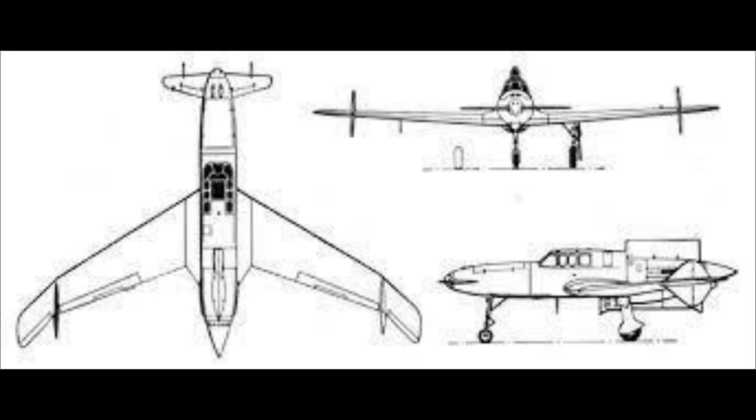Interestingly, it specifically allowed for out-of-the-box thinking, unconventional aircraft designs. Yes, children, you do not need to color inside of the lines. And with the XP-55, Curtiss-Wright definitely decided to color outside of the lines.

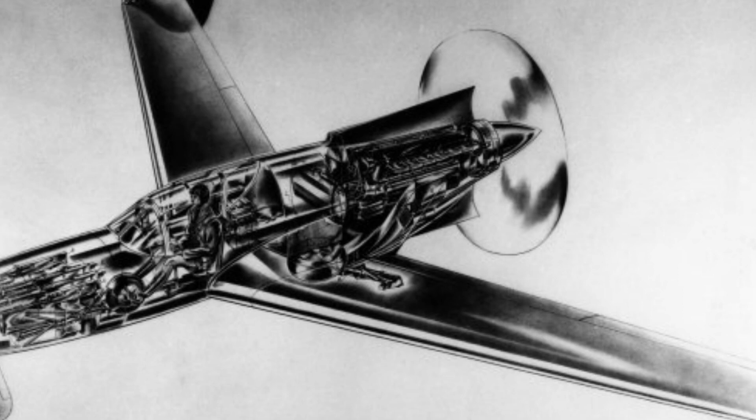Firstly, they decided to put the engine in the back, which is called a pusher configuration. Now, that is not inherently radical, as plenty of aircraft over the years, including the Wright Flyer, have been pushers. There are actually lots of advantages in having the engine in the back, especially when thinking of the requirements of the R40C proposal. The first is performance.

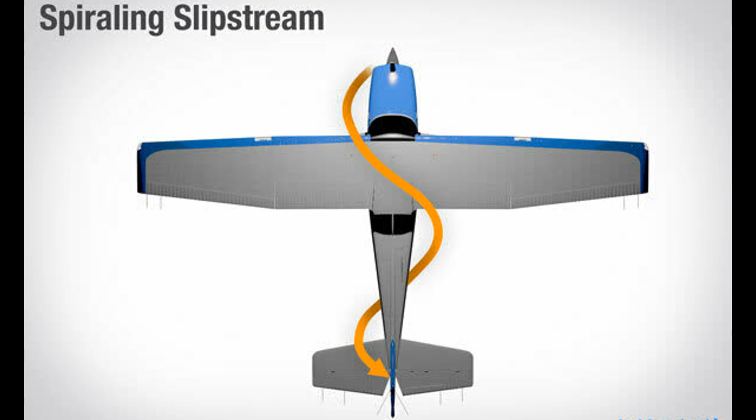Without prop wash being flung over the wings, fuselage, and empennage, you have clean and undisturbed air moving over these surfaces. There is no rotating prop wash hitting the tail fin to deal with, so not so much rudder input is needed on takeoff. Visibility is improved without the engine and the whirling prop in front, and you can easily put more and concentrated armament in the nose, where the bullets and cannon shells will be coming straight out forward without having to deal with shooting around or through a propeller arc.

Finally, pushers can be safer for the pilot, as all that hot metal and fuel and oil and stuff is located behind him. With an engine fire, rather than the airstream blowing all the fire in his face, it'll actually be burning away and behind him.

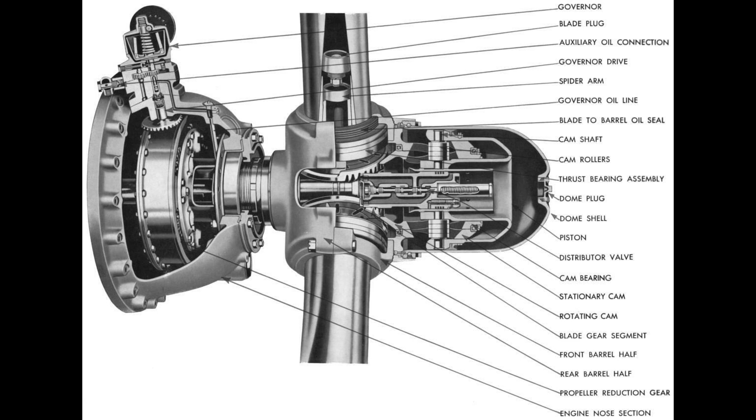Of course, there are a few really significant disadvantages in having a pusher too. Firstly, the engine needs to be designed to do it, as pushing, rather than pulling, introduces different stresses on bearings and such. Remember I said that having the engine in the back allows for clean air over the wings and control surfaces? Well, that means that the propeller now is the surface receiving the dirty and disturbed air, which leads to a loss of thrust performance.

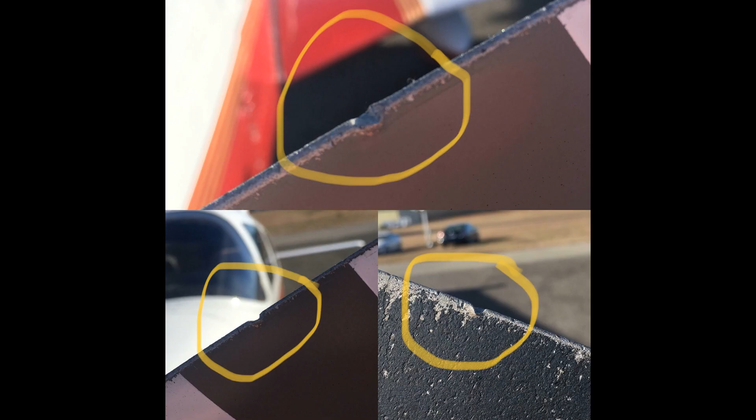There is the problem of the propeller arc being closer to the ground during takeoff and landing. In order to deal with that, you need to shorten the prop, or lengthen the gear, or introduce some sort of tail skid to protect against prop strikes. Of course, with the propeller tips so close to the ground, there is a much greater chance of striking rocks or other debris, especially on unimproved airfields.

Engine cooling, always a major consideration, is always a problem with this configuration. Unlike an air-cooled radial in the front, a pusher engine, unless it is mounted or hanging below a pylon or something, is buried within the fuselage, and so probably will need liquid cooling to get the heat out to radiators. And finally, there is the disconcerting problem of the spinning meat chopper back there if you have to bail out. We don't want the pilot to hit the fan when the poop hits the fan.

So Curtiss-Wright started by putting the engine in the back, which led some to think of the plane as being backwards.

I don't know which name came first, Ascender, as in climber, or the joking version, Ass-ender, implying backwards.

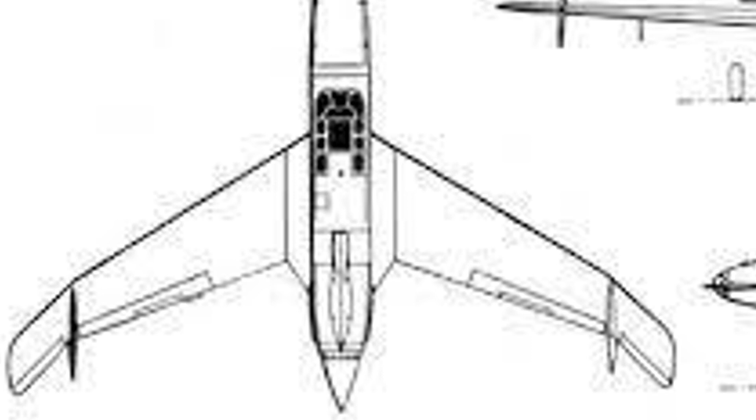So with the engine in the back, something needed to replace the aerodynamic functions usually performed by the tail that was not there. Pitch would be controlled by the canard, basically a horizontal stabilizer and elevator in the nose. Yaw control would be achieved through fins on the wingtips.

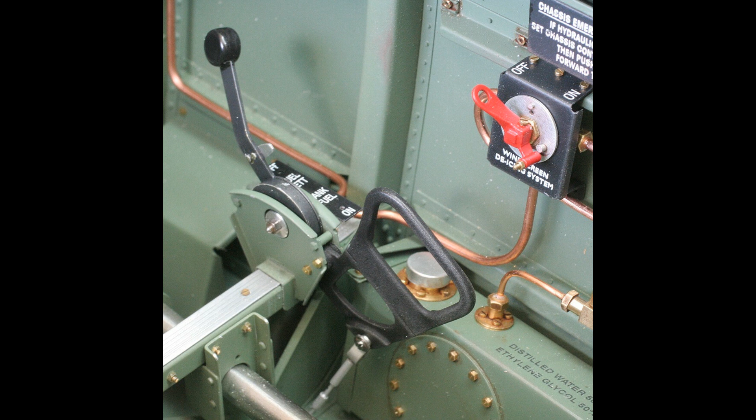It would have tricycle gear, which was unusual for the time, but would help with that prop striking the ground on takeoff and landing problem. As for the pilot bailing out and the meat chopping problem, that was solved by installing a propeller jettison lever inside the cockpit. You'd hate to pull that one by accident. Oops, there goes the prop.

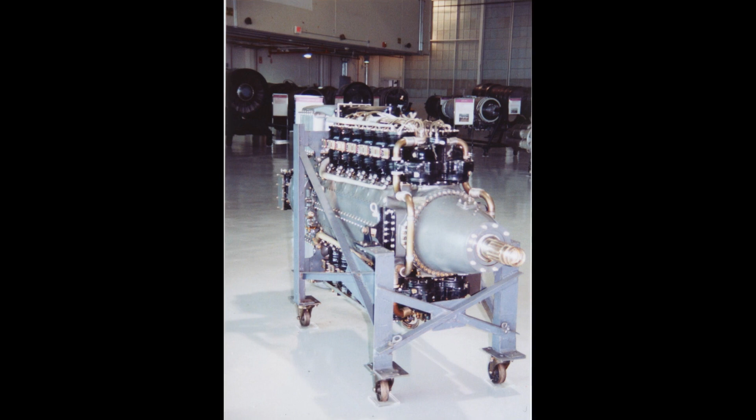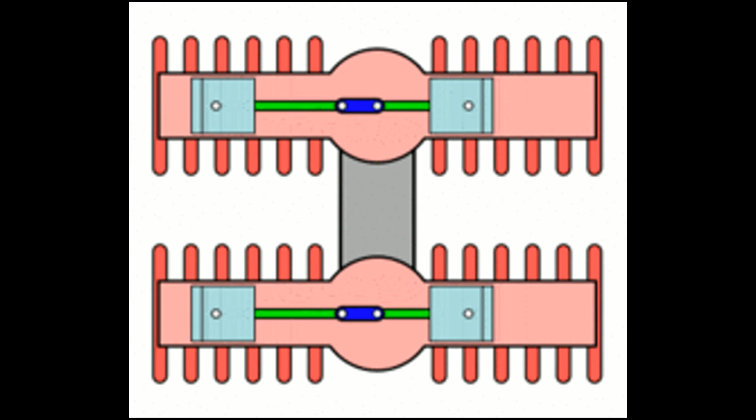The engine turning the prop was to be the promising sounding Pratt & Whitney X1800 engine. This was a 24-cylinder H configuration engine, where two horizontally opposed banks of cylinders are geared together into the common propeller shaft. The 1800 referred to the planned horsepower output.

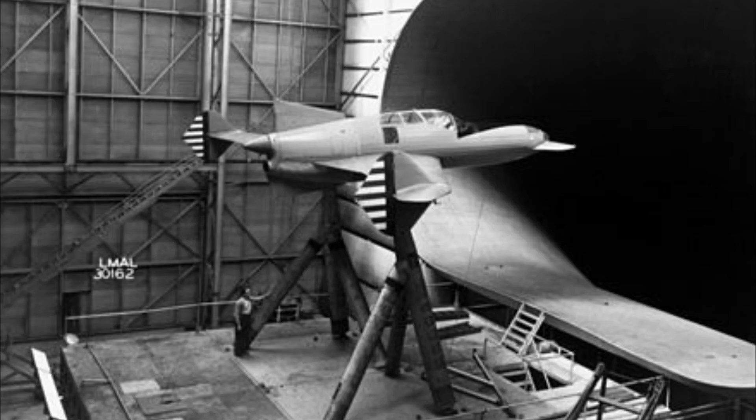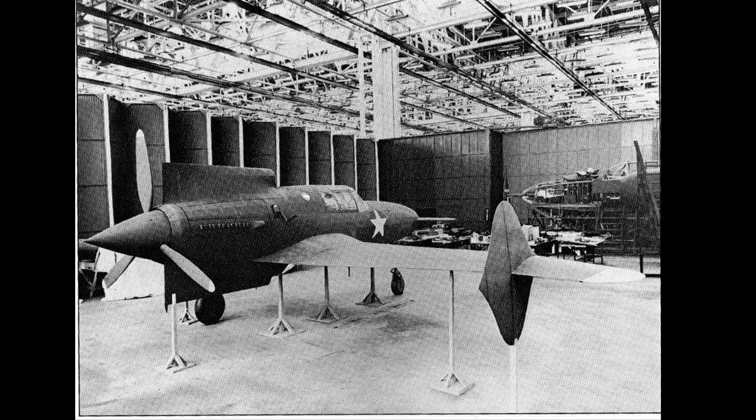In June 1940, Curtiss-Wright got the Army go-ahead for a powered wind tunnel model, and the aircraft was given the designation of P-55. The results of the wind tunnel testing were not great, but Curtiss-Wright believed in their bird and so sunk their own money into a full-scale flying model made of fabric-covered, welded steel tube fuselage, with wings made of wood. Maybe because of this effort, in 1942, a further go-ahead was given to build 3 prototypes.

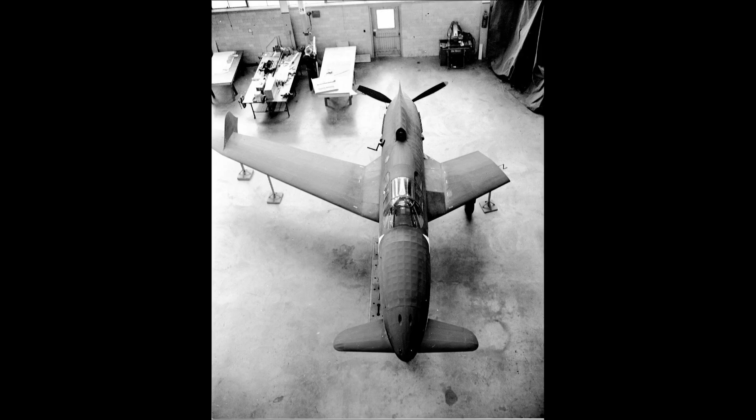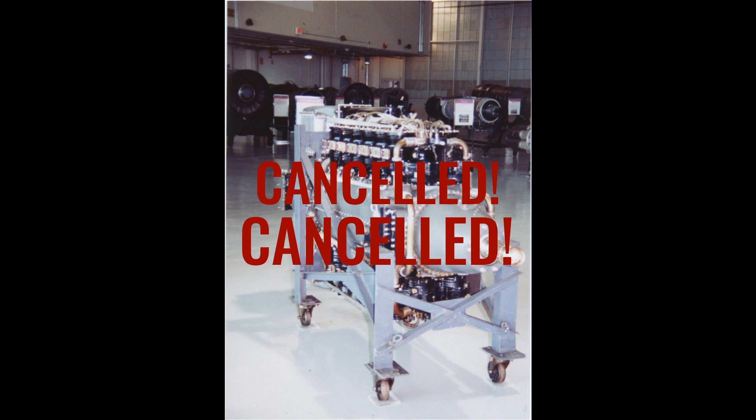Great! It seemed like the Ascender was finally getting somewhere. Well, kinda. Before the prototypes could be built, the promised Pratt & Whitney X1800 was cancelled, and so now Curtiss-Wright was left scrambling for a new engine. They chose the less powerful 1,000 horsepower Allison V1710. At least it was reliable.

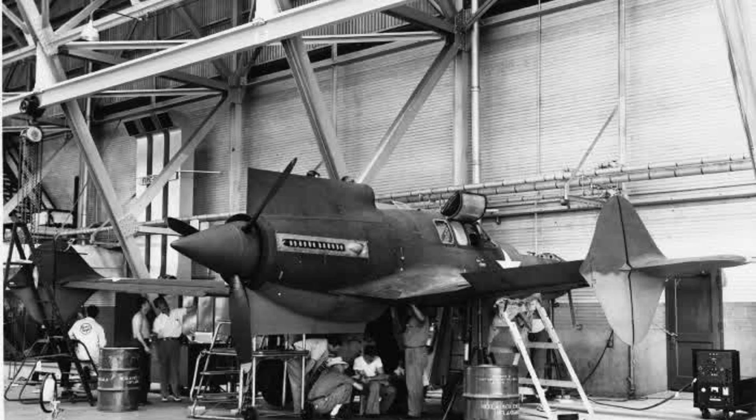The first prototype Ascender, serial number 42-78845, made its maiden flight on the 19th of July, 1943, from Scott Field near St. Louis, Missouri. The takeoff run was way longer than expected, so the plane went back to the shop for tinkering. The nose elevator size was made bigger, and the aileron up trim was interconnected to the flaps. When the flaps were lowered, the ailerons would automatically up-trim.

In November 1943, test pilot Harvey Gray was flying the prototype and testing its stall characteristics. During these tests, the prototype flipped inverted and dove into an uncontrolled descent. No matter what he did, Gray was unable to regain control, and after struggling for 16,000 feet, he gave up, bailed out, and parachuted safely to Earth. The prototype P-55 made a big hole in the ground.

Luckily, the next prototype, serial number 42-78846, was soon ready. It had an even larger nose elevator and a few other changes. It first flew on 9th of January 1944, with restrictions in place to avoid that wicked stall zone. Prototype number 3 flew in the spring of 1944 and had some stall improvement changes, including extending the wingtips by 4 feet and increasing the limits of the nose elevator travel. It was also fitted with 4 machine guns.

The P-55 began official USAAF flight trials, where it was found to have actually poorer performance than conventional fighters of the day, and so it was decided that further development was terminated. But they still had 2 flying prototypes that were pretty cool looking, and so there had to be something that could be done with them.